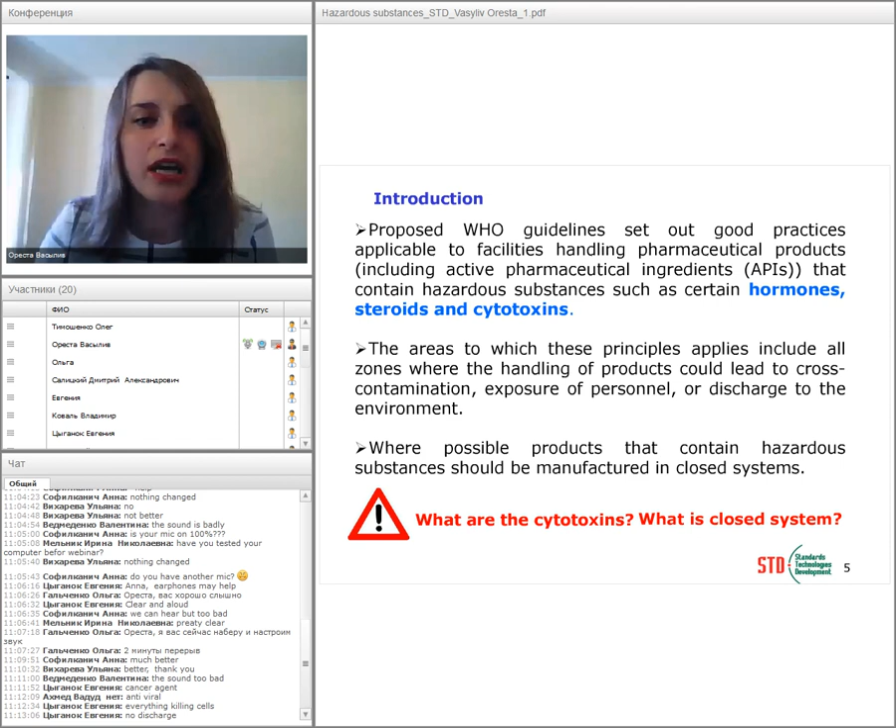And what is a closed system? How do you think, what is a closed system? So a closed system is where all the processes are being handled inside. For example, it's a clean room where all the operations are located inside, nothing goes outside. In that case, a closed system definitely should be applied, yes, there is no discharge. Should be applied when we work with hazardous substances.

So facilities should be designed and operated in accordance with the main GMP principles, good manufacturing practice principles. What do these principles include? To ensure quality of a product, definitely when we work we want the quality of our product to be the best, and therefore we need to apply principles that ensure our quality will be at the highest level. To protect the operators from possible harmful effects of products containing hazardous substances.

We also should care about workers that conduct operations with hazardous substances. Hazardous means toxic, something that can damage our health. To protect the environment from contamination and thereby protect the public from harm. Harmful is the same as hazardous. Protect the public from possible harmful effects of products containing hazardous substances.

So again, a question for you. Give me a few examples, maybe according to your experience, what are the hazardous substances generally used at pharmaceutical industry? What substances can we call hazardous, toxic, harmful? What could it be? Any variants?

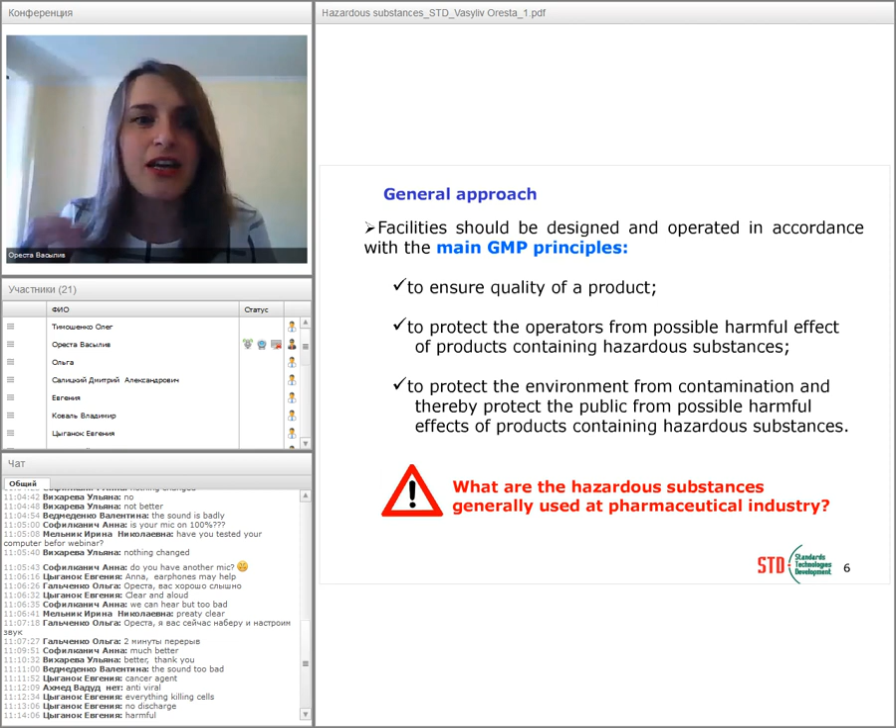For example, mercury-containing substances, definitely they possess a high level of toxicity. Some substances, we say, can have very bad, harmful influence on the health of workers.

The production of certain products containing hazardous substances should generally be conducted in separated, dedicated, and self-contained facilities. What does separate mean? They should be located separately from one another. Everything should be located inside. Dedicated means the specific operations are conducted only in these facilities, only in these premises, because these facilities are constructed specifically so that this operation should be conducted only in this particular space, this particular room.

Self-contained means the same as closed facility, as we discussed a little bit earlier, everything on which we are working is located inside, we do not allow anything to release outside. These self-contained facilities may be in the same building as another facility, but should be separated by a physical barrier and have, for example, separate entrances, staff facilities, and air handling systems.

Definitely, that should support the good work while we are working with different substances. The extent of the separation from adjacent facilities and sharing of common services should be determined by risk assessment, depending on the toxicity or hazardousness of a substance.

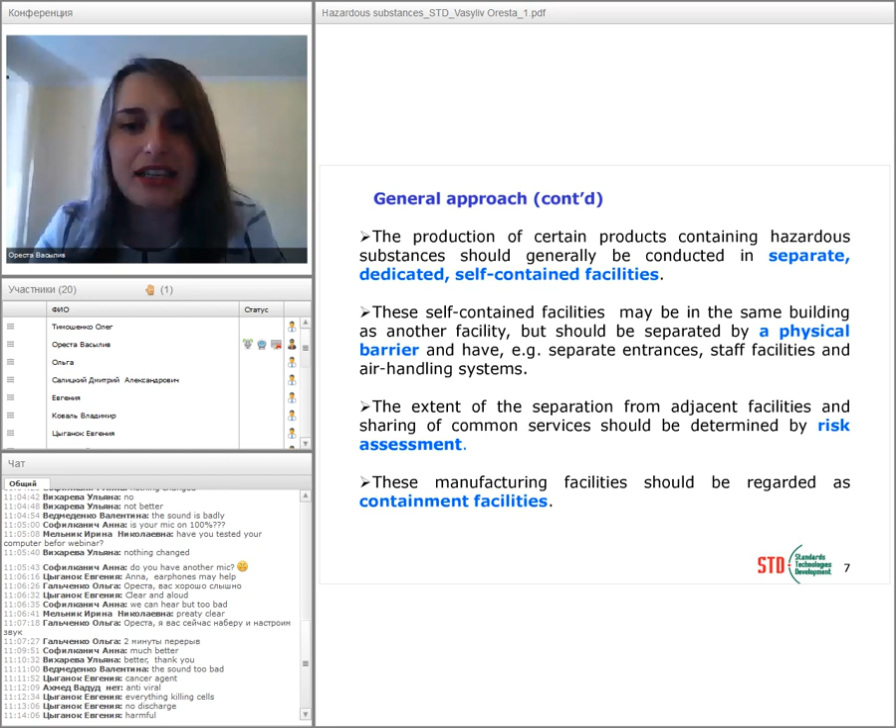These manufacturing facilities should be regarded as containment facilities. Everything that is located inside should stay inside. This means a containment facility.

Operation of closed facilities. Effective aspects of handling containment premises include appropriate facility design and layout, with emphasis on safely containing the materials being handled. The facility design should support the safest conducting of all operations done with hazardous substances.

Manufacturing process using closed systems or barrier technology enhances operator and product protection. So layout means the plan, the scheme of the facility.

Manufacturing process controls, including adherence to standard operating procedures. Definitely we need to have standard operating procedures according to which we conduct all operations.

Appropriately designed environmental control systems, ECS, or heating, ventilation, air conditioning systems, HVAC. I hope we are more familiar with the term HVAC than ECS, but in health documentation sometimes they are made equal, as ECS means HVAC.

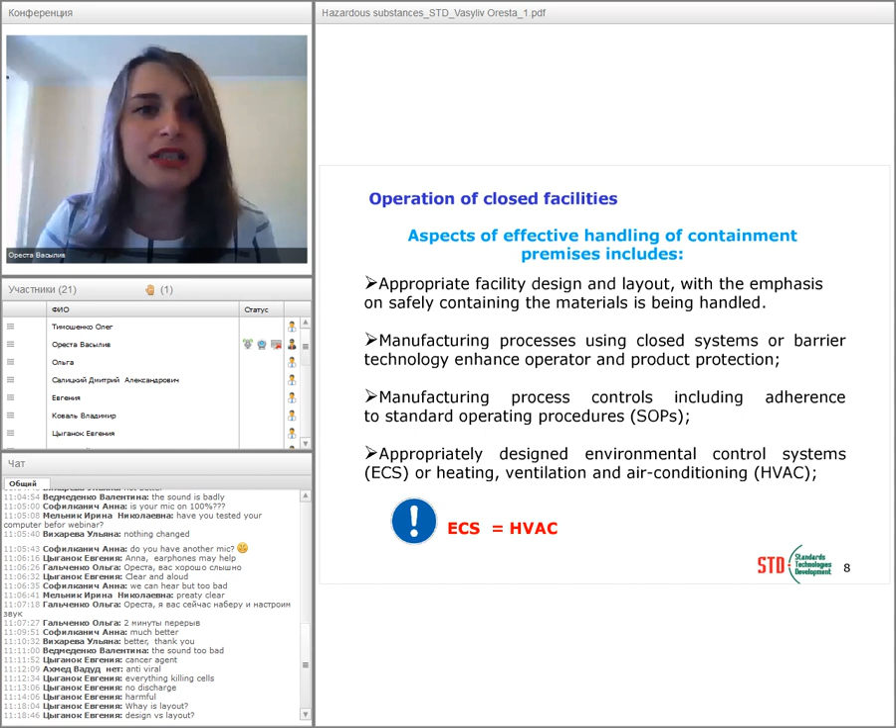Moving on. Operation of closed facilities definitely includes availability of extraction systems, application of personal protective equipment, because we talk about hazardous substances, and appropriate degowning and decontamination procedures.

What does degowning mean? It refers to procedures that tell us what appropriate gowning we need to wear while working in particular classes of cleanliness, and what appropriate protective clothes we need to have.

Decontamination - what does that mean? Please provide me the explanation. In that case I will see whether you understand what we are talking about here, or if I need to explain some terms a little better.

So what is it? Yes, removal of contaminants. Very good, its synonym is cleaning. Good, thank you. Industrial hygiene - what does that mean?

What does industrial hygiene mean? It includes monitoring staff exposure levels and medical surveillance. Monitoring staff exposure levels means focusing on the health of workers, while medical surveillance means checkups with doctors, and administrative controls.

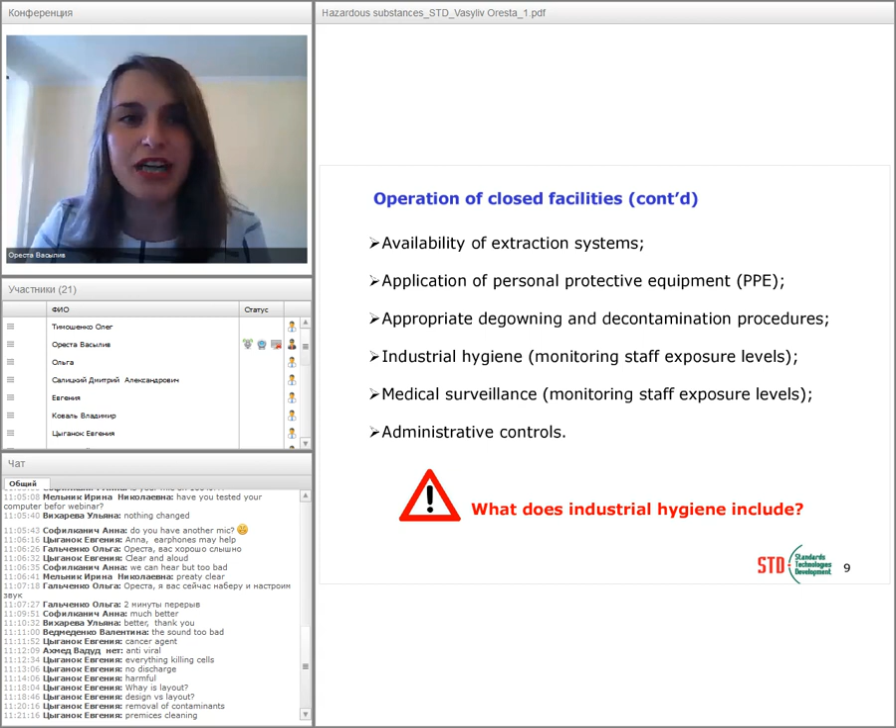Premises cleaning - good, yes. Using appropriate clothes when we work in different classes of cleanliness - yes. Determining the standard operating procedures when we work in different premises, and much more.

Now let's determine some particular terms that we mostly use today, which we can find in the normative documents. Glossary means vocabulary. Action limit - what is an action limit?

An action limit is reached when the acceptance criteria of a critical parameter have been exceeded - when our results exceed the acceptance criteria for this index. Results outside these limits will require specified action and investigation.

So when we reach the action limit, definitely some actions need to be applied for reducing the risk and reducing this data.

Okay, I will answer this - mezha dii, this is the Ukrainian variant for action limit.

Airlock is an enclosed space with two or more doors, interposed between two or more rooms, for example of different classes of cleanliness, for the purpose of controlling the airflow between those rooms when they need to be entered. An airlock can be for materials or for personnel, so we call it personal airlock or material airlock.

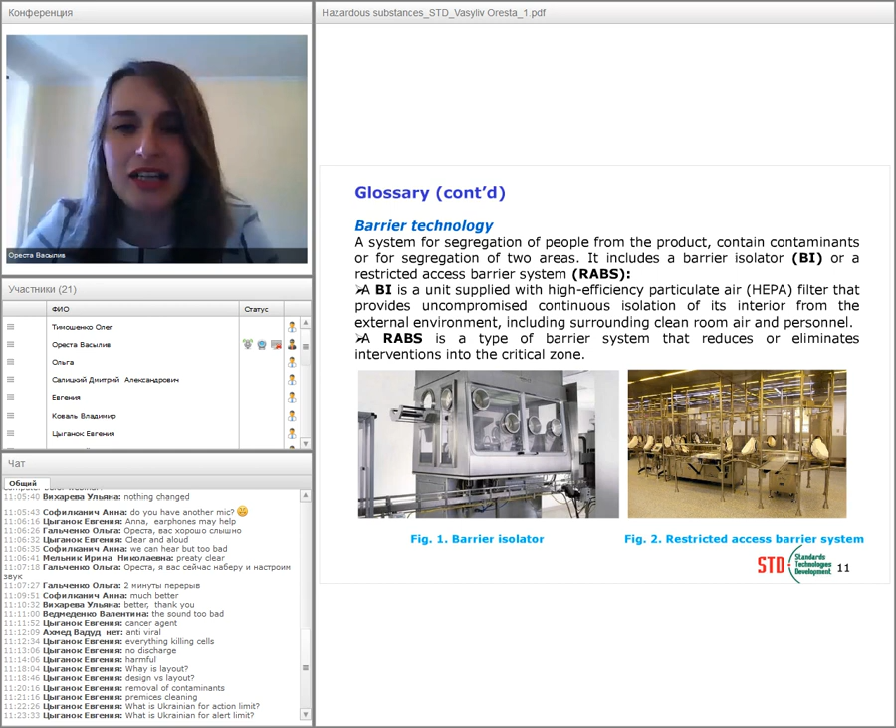What is the difference? With a barrier isolator, we can come inside this system and work there. When we talk about restricted access barrier systems, these are particular isolators where we can only put our hands through with specific glove ports, and operations are conducted this way. You can see images, figure 1 and figure 2, showing particular examples of a barrier isolator and a restricted access barrier system.

Containment. Containment means it's not contamination - it means that everything in the operation, process, device, dust, and contaminants remains in one zone, preventing it from escaping to another zone. Facility is a building or specific establishment where the operation is handled.

Hazardous substance or product is actually some toxic substance or product about which we are talking.

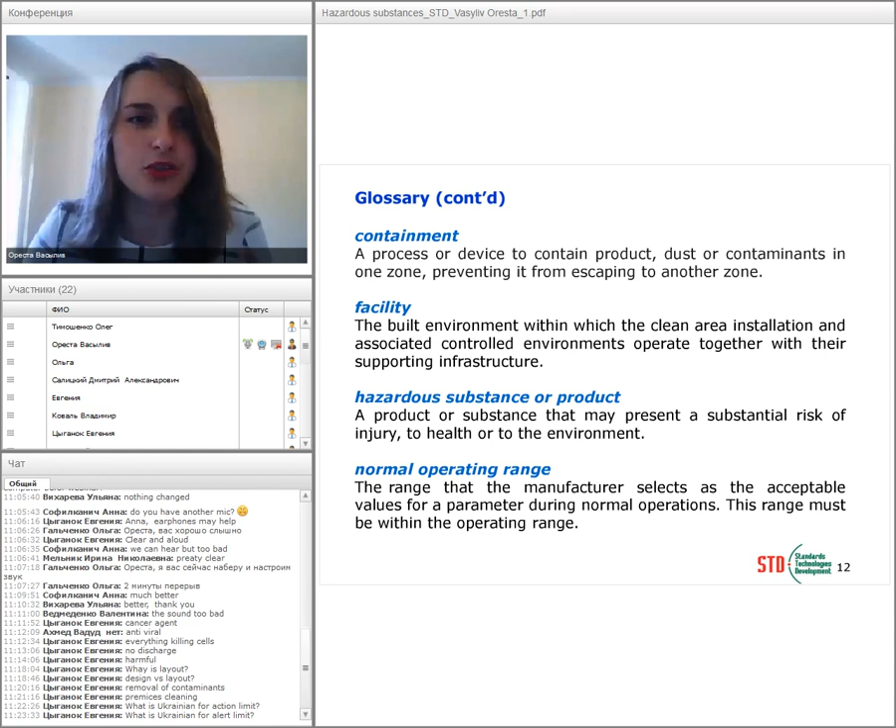Normal operating range is the range that the manufacturer selects as the acceptable values for a parameter during normal operation. This range must be within the operating range - it's like the range for a particular parameter in which we know it is okay and applies to normative requirements.

Personal protective equipment is the necessary garment and equipment required to protect the operator in the workplace.

Unidirectional airflow is rectified airflow - it means the one direction of airflow that crosses the entire cross-sectional area of the clean zone. It has steady velocity, meaning permanent stable speed, and approximately parallel streamlines.

Validation is a documented act of proving that any procedure, process, equipment, material, activity, or system actually leads to the expected result. With validation, we show that our process is reliable, our data is trustful, and this process is working absolutely fine and gives us trusted data.

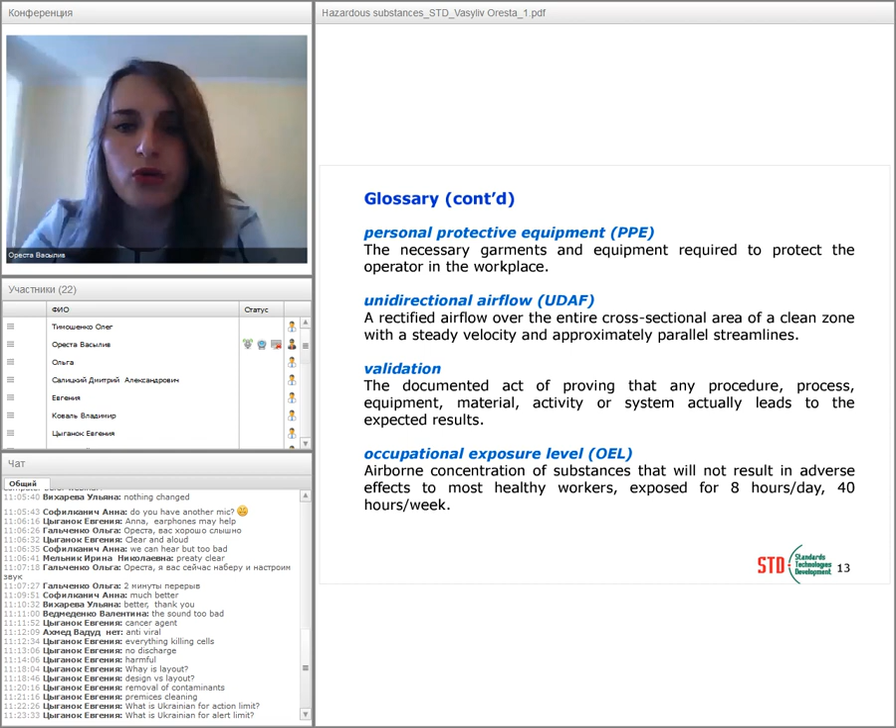Occupational exposure level is very important when we talk about hazardous substances. This is the airborne concentration of substances that will not result in adverse, meaning harmful or dangerous, effects to most healthy workers exposed for 8 hours per day, 40 hours per week.

Let's talk now about risk assessment of substance toxicity. Risk assessment should be carried out to determine the potential hazards of the substance to operators and to the environment. The risk assessment is devoted to specific processes, specific phases of the product production and control cycles, with which we can see which phases possess higher or lower risk, depending on our process.

...depending on the influence to the operators and to the environment. Risk assessment of environmental contamination should include airborne contamination as well as liquid effluent contamination - effluent means wastewater, so we talk about liquid wastewater contamination. Risk assessment should take into account national and international occupational health and safety requirements for permissible occupational exposure levels for the product in the work environment.

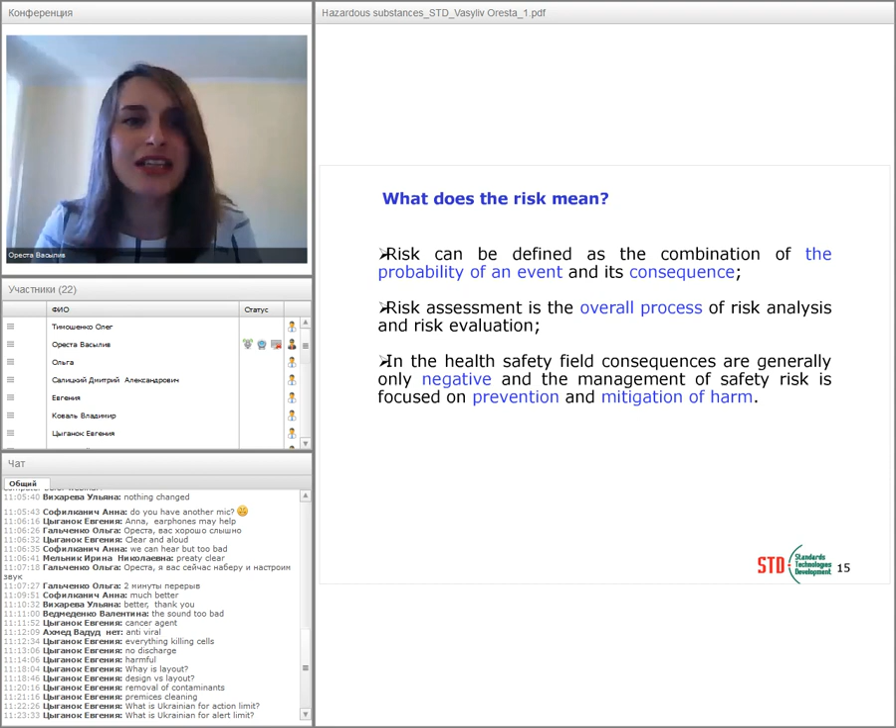Risk means actually the combination of the probability of an event and the consequence in case this event happens - so the reason and the result. Risk assessment is the overall process of risk analysis and risk evaluation. With risk assessment, we want to see all the negative consequences that we can get in various situations.

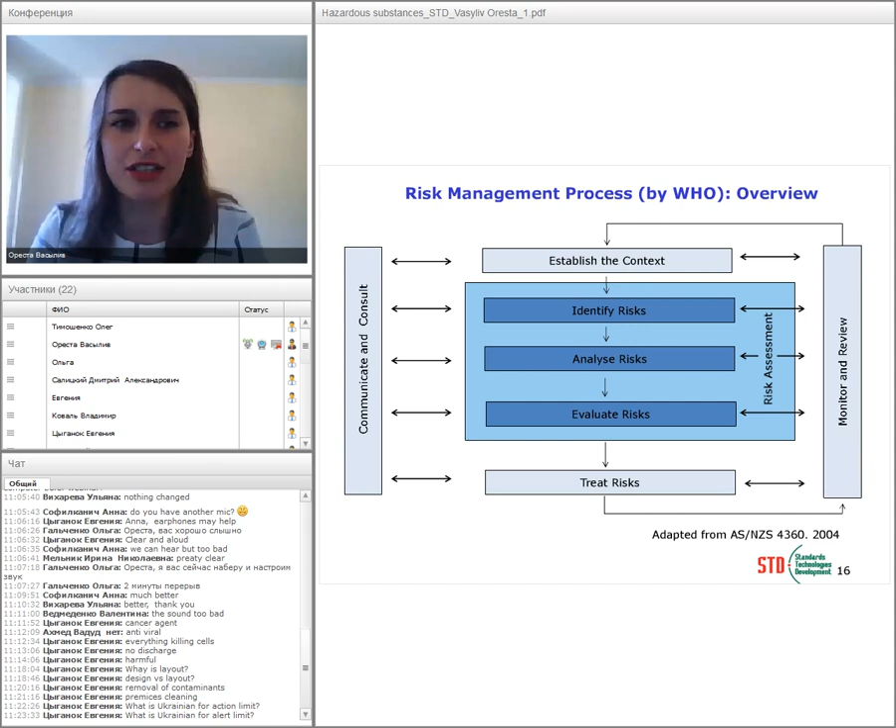The risk management process has such a scheme that we will discuss more in the full version of the webinar, not today. So the basic approach for risk assessment of substance hazardousness can include such a simple formula with which we can determine - this is a very basic, general approach to determining the hazardousness of substances.

With this approach, we multiply 4 factors. Risk from hazardous substance effect is the multiplication of: A, level of substance toxicity, determined from specific standards in which the hazardousness of different substances is determined, depending on the influence on the health of workers; B, ease of substance dispersion and transfer; C, contact of the staff with the hazardous substance during operations; and D, effectiveness of precautions and barrier technology.

For example, let it be glucose. Yes, it's not toxic, so we see the level of substance toxicity is 0.

Ease of dispersion and transfer of hazardous substances is very low, so it will be 0.5. Contact of staff with the hazardous substance while operating - let's take, for example, if we have an automatic process, so contact is only under necessity, for example if a machine breakdown occurs, and if our cleaning is not automatic, so it's during cleaning. Effectiveness of precautions and barrier technology - let's say that our barrier technology provides very good protection. So we multiply 0, 0.5, 1, and 0.5 by this formula, and again we got 0. So we have low risk.

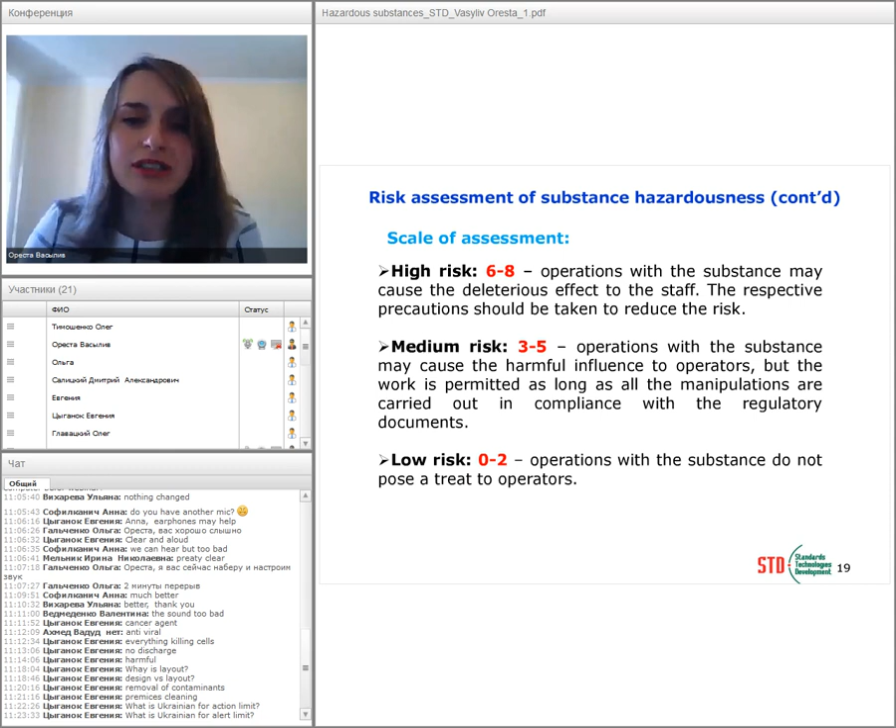So this is like the basic approach for risk assessment. There also exist different other risk assessment approaches for risk assessments of substance hazardousness, but we will discuss it in the full version of the webinar.

So now we move on to personal protection equipment and breathing air systems. Operators should be protected from toxic exposure of hazardous materials by wearing high-density polyethylene fiber material suits. Those suits should not contain any organics, because in that case they may become an additional pollutant in the clean rooms.

Or impervious means - integral, washable protective suit shoes, lower leg covers, or cleanable boots. This can be seen in figure 3. Integral hoods may be required depending on the respirator type that is used.

Suitable means appropriate. Single-use disposable gloves, definitely depending on the operation. Double gloves should be worn where direct active contact with the product cannot be avoided.

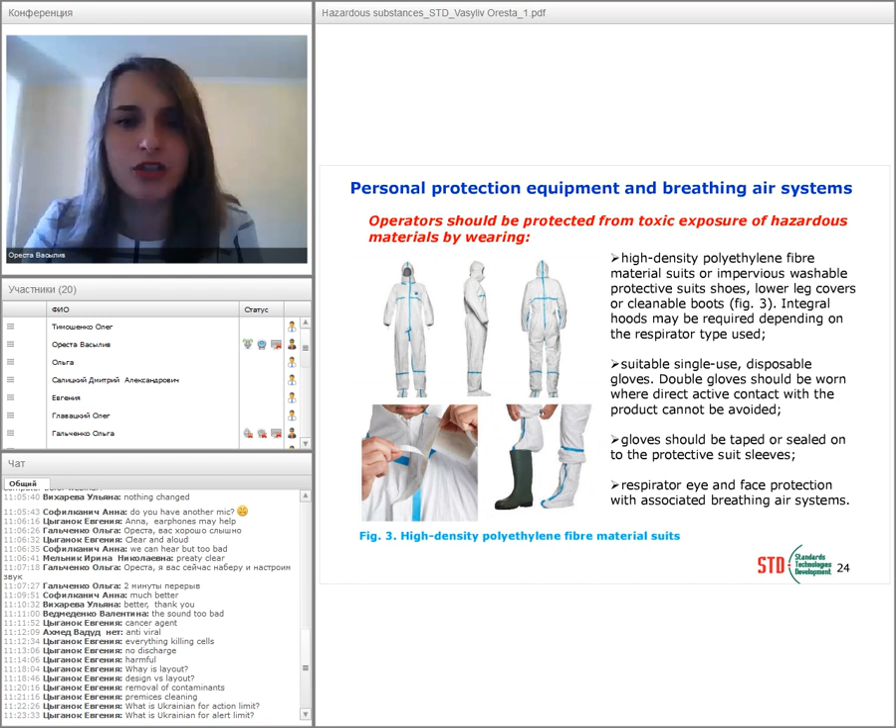So, respirator, eye and face protection with associated breathing air systems. Definitely depending on our risk assessment, on our operation, toxicity of the substance, class of cleanliness and other factors, there is appropriate gowning procedures, appropriate costume, and the industrial suit that we should wear for conducting these operations.

Okay, personal protection equipment, breathing air system. So let's talk a little bit about air supply and particular air respirators. Under application of breathing air systems, the safe breathing air should be provided to the operators. Yes, so this is like the basic scheme of the system of air supply and changeover.

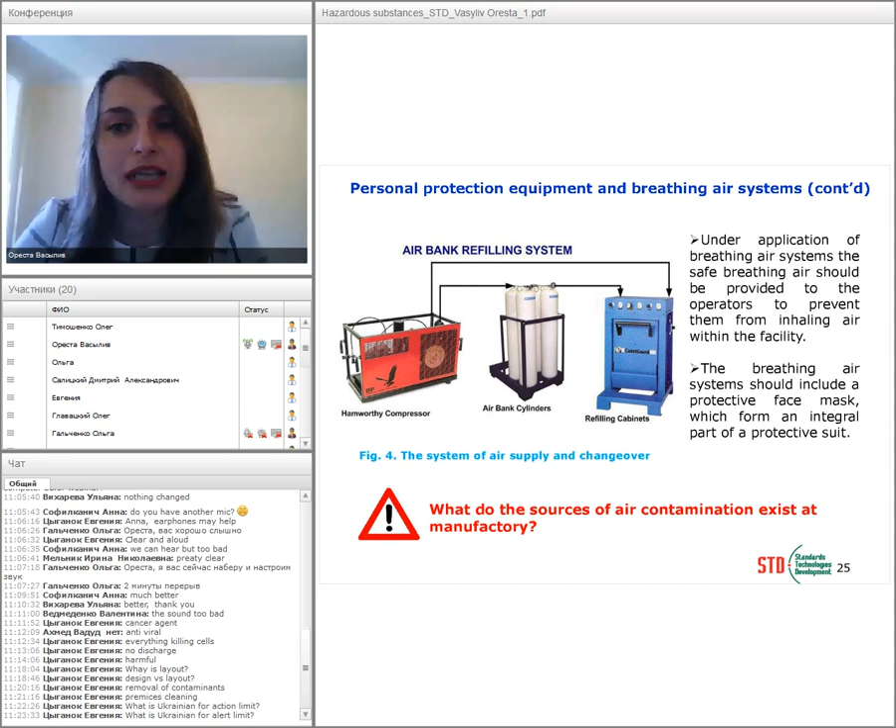This, while providing such air, means that the operator is protected from inhaling air that may contain particles of hazardous substances that may cause a really very dangerous effect on personal health. The breathing air system should include a protective face mask, which forms an integral part of a protective suit. So there exist various types of breathing air systems.

Today we will discuss 3 of them. So first is an airline respirator - it has a central air supply system that you could see on the previous slide. It connects to the operator's face mask by means of flexible hoses and quick coupling sockets. So actually, this is not a dynamic system - it's located in one area and is completely automatic.

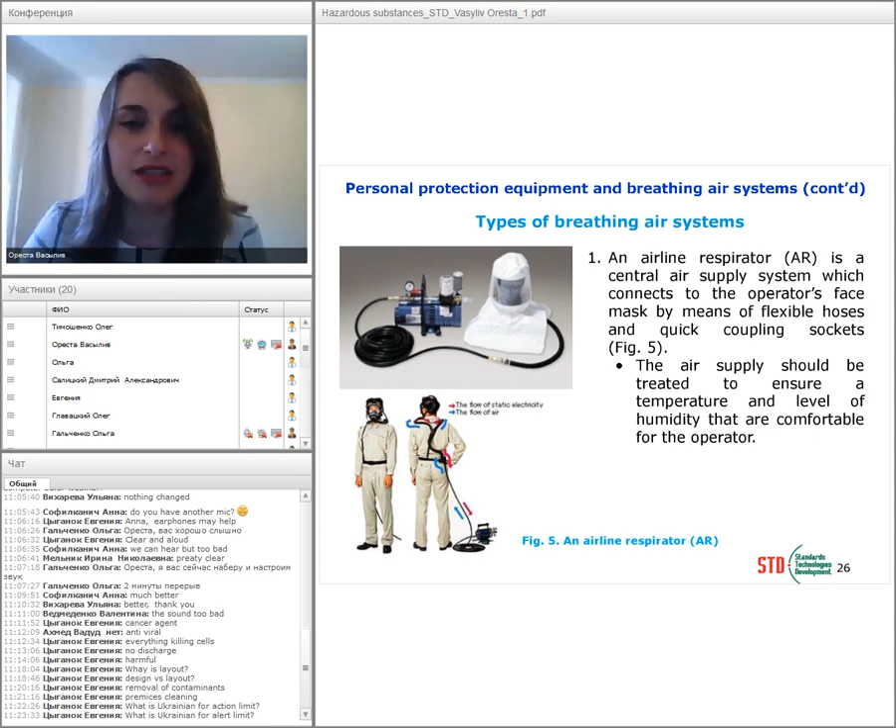The air supply should be treated to ensure a temperature and level of humidity that are comfortable for the operator. Definitely, these parameters need to be controlled because this air is being inhaled by the person who works in this premise with a hazardous substance.

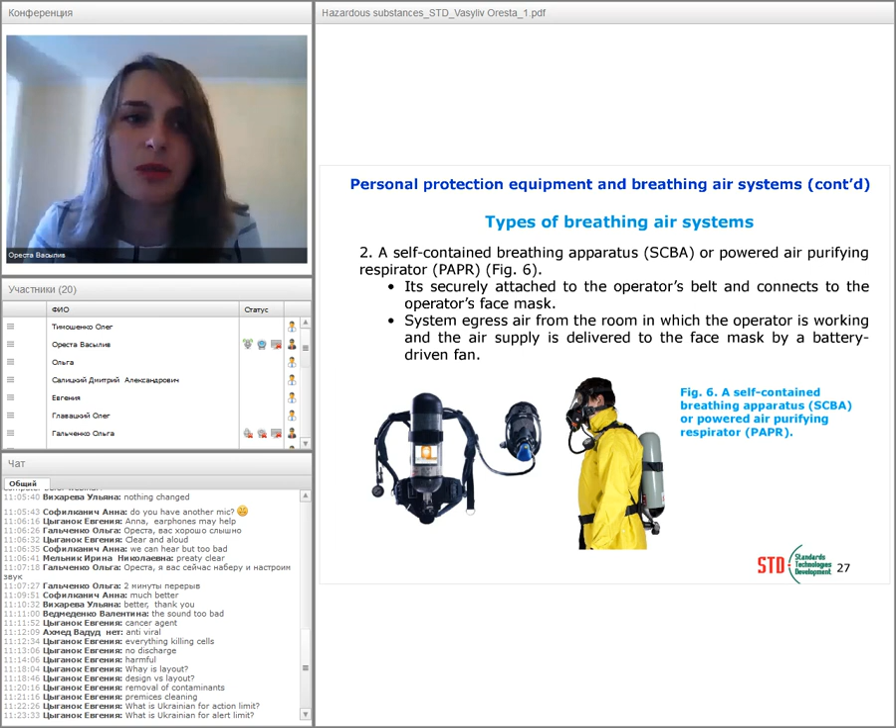Another type of breathing air system is self-contained breathing apparatus or powered air purifying respirator, SCBA or PAPR. It's securely attached to the operator's belt and connects to the operator's face mask, so it's more movable and doesn't need to be located in one place. The operator can put the balloons on his back, as shown in the figure, and breathe with the safe air located in this balloon. This can be applied for substances with a lower level of toxicity compared to the previous equipment.

When we talk about lower hazardous substances, we may use only a half mask with a high efficiency particulate air filter cartridge respirator, or an N95 type paper filter mask. N95 means that the effectiveness of filtration of particles is 95%, except oil particles - it does not work for oil particles. It does not require any additional electronic supply.

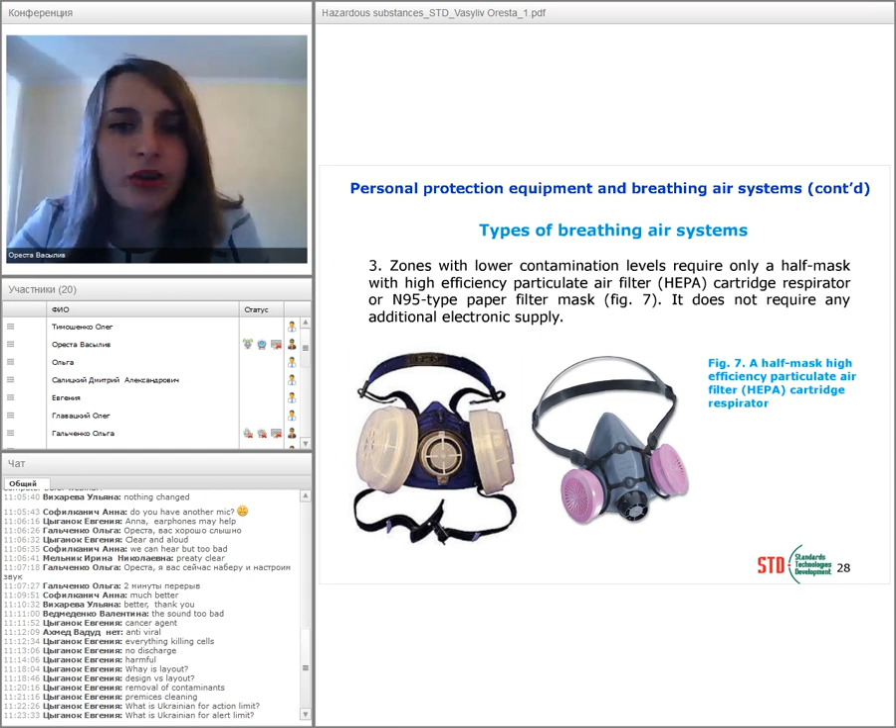A central breathing air supply system should definitely have a backup system in case the main system fails. This could be in the form of a gas bottle system with at least 5 minutes of supply, to avoid suffocation of the personnel in case of breakdown. Changeover from the normal supply to the backup supply should definitely be automatic, otherwise it can be very dangerous for the personnel.

The system should have a monitoring system and send alarm signals to a permanently monitoring location. This is important in situations such as failure of the main air supply, temperature out of specification, humidity meaning the content of water in the air, or when the gas content of the air is not appropriate - for example, carbon dioxide, carbon monoxide, sulfur dioxide, or other gases inside this air.

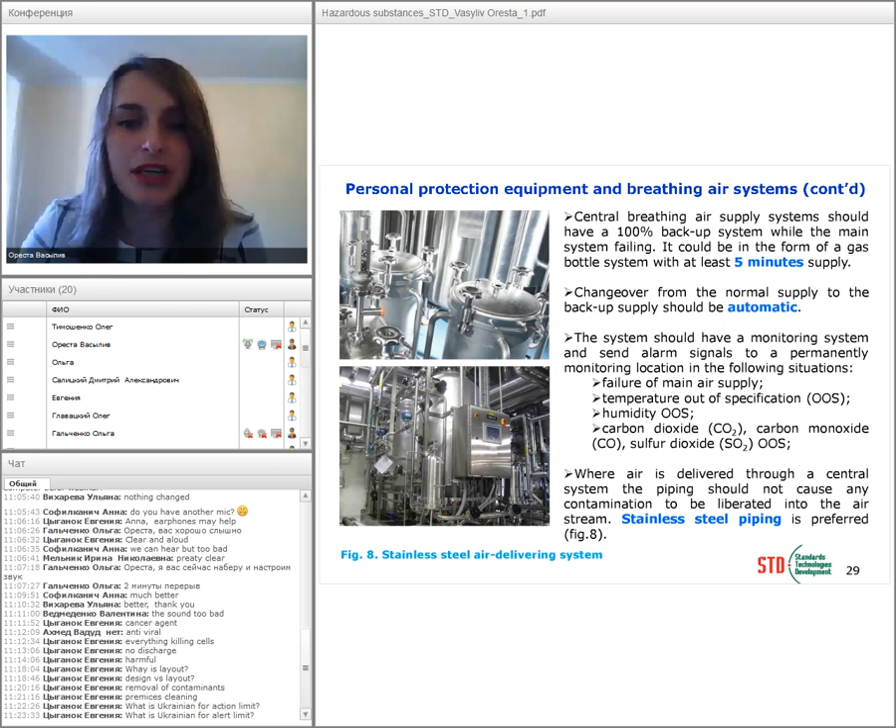Where air is delivered through a central system, the piping should not cause any contamination. It's recommended to use stainless steel piping because it does not liberate particles that can have adverse harmful effects on the operators.

Due to the hazardous nature of the product being handled in the facility, neither the product nor its residues should be allowed to escape into the atmosphere, because it can have a dangerous, very harmful effect on the environment. They should also not be discharged directly to the normal drainage system. The actual atmosphere and the public in the vicinity, meaning the nearby territories of the facility, should be protected from possible harm from hazardous substances. If liquid effluent possesses a safety or contamination risk, the effluent should be treated before being discharged to a municipal drain.

So the question for you: how could a hazardous substance affect the surrounding environment? Please give at least one example. I want to see how well we understand this, whether I need to explain something more. So how could a hazardous substance affect the surrounding environment? Please give one example.

Yes, contamination of groundwater, definitely. Some contamination, acidifying of grounds, waste water - they could cause contamination of water and grounds. That can have a really very deleterious, very adverse effect on our atmosphere, and therefore we need to be very careful while working with hazardous substances and avoid allowing them to escape into the environment.

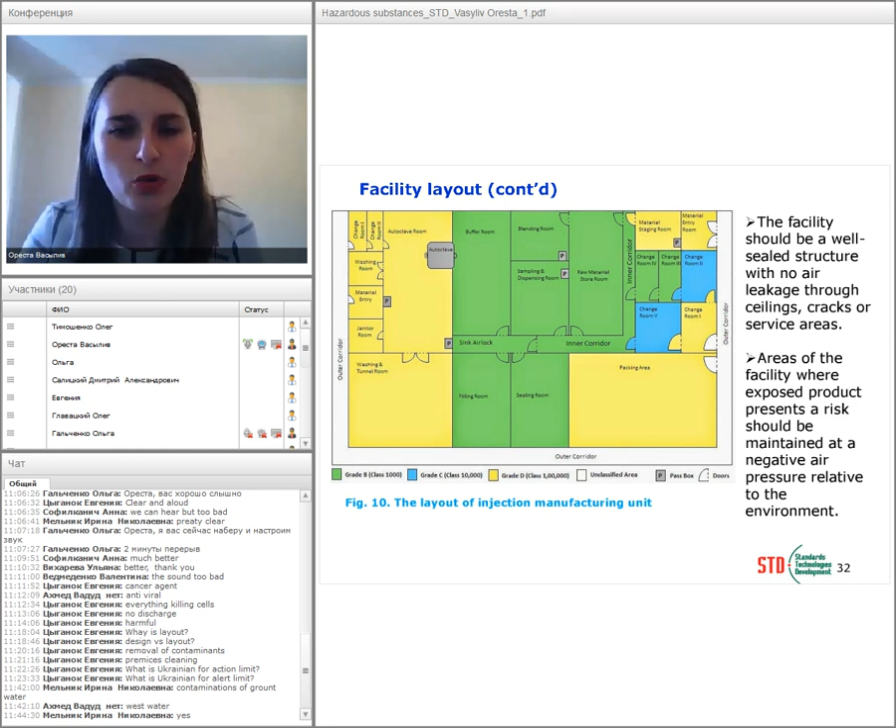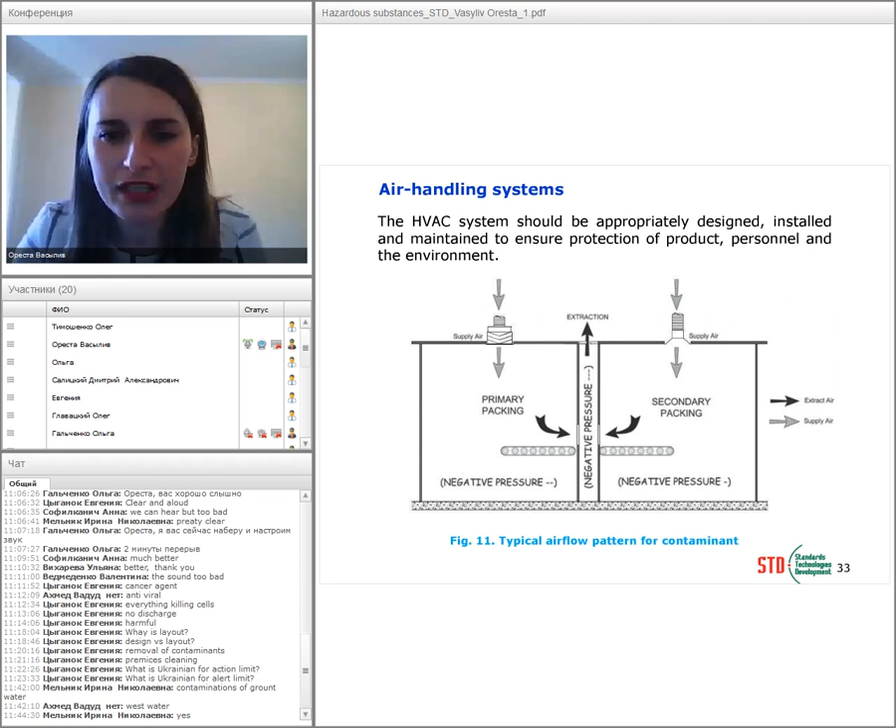Air handling system - what about it? The main thing is that processes with a higher level of cleanliness need to be conducted under more negative pressure compared to processes with a lesser level of cleanliness. You see, the primary packaging is under more negative pressure than secondary packaging.

Basic air handling characteristics of facilities and premises dealing with hazardous substances include: first, air conditioning and ventilation should be under negative pressure relative to the outside, to avoid hazardous substances escaping to the environment. Uncontrolled flow of air between the work area and external environment, or direct venting of air to the outside, is strictly prohibited, because we are always talking about containment facilities.

Visual indication of the status of room pressures should be provided in each room. Air should be exhausted to the outside through HEPA filters and not recirculated, with a further HEPA filtration stage applied to the return air. Where possible, single-pass air handling systems with no recirculation should be provided.

And again, a question for you: what are the risks, in your opinion, of recirculation of exhausted air? I'm waiting for your answers - at least one example.

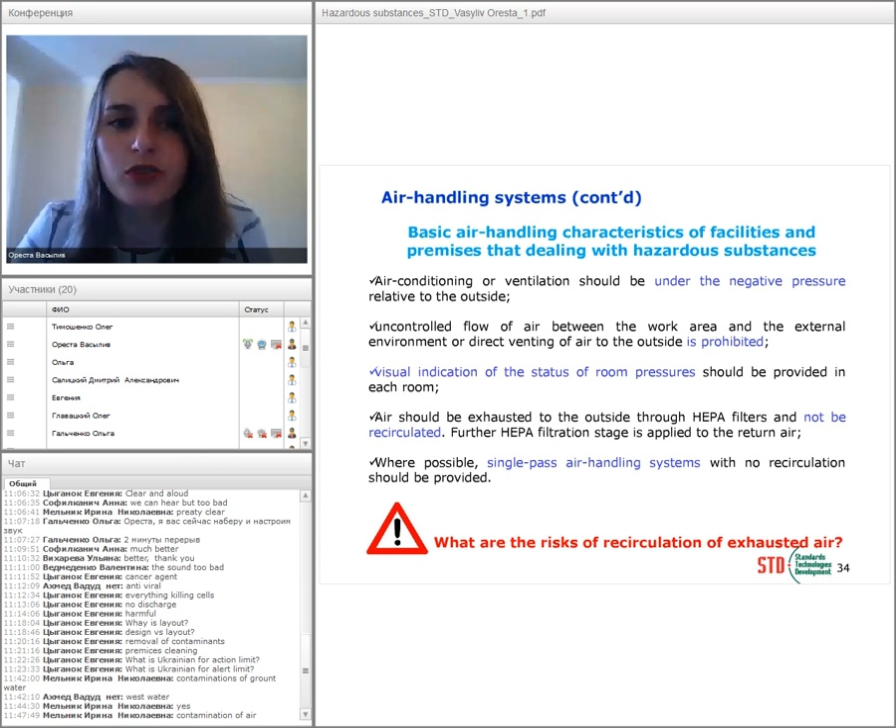Contamination, yes - additional contamination of air, and toxic influence on personnel, because if there is no set classes where respirator air systems are applied, and there is recirculation of air even in non-clean zones, or in locations where work with less toxic substances is being carried out, we can have a high risk to personnel health and to our processes. It can lead to cross-contamination. So this is not a good idea, to have circulation of exhausted air.

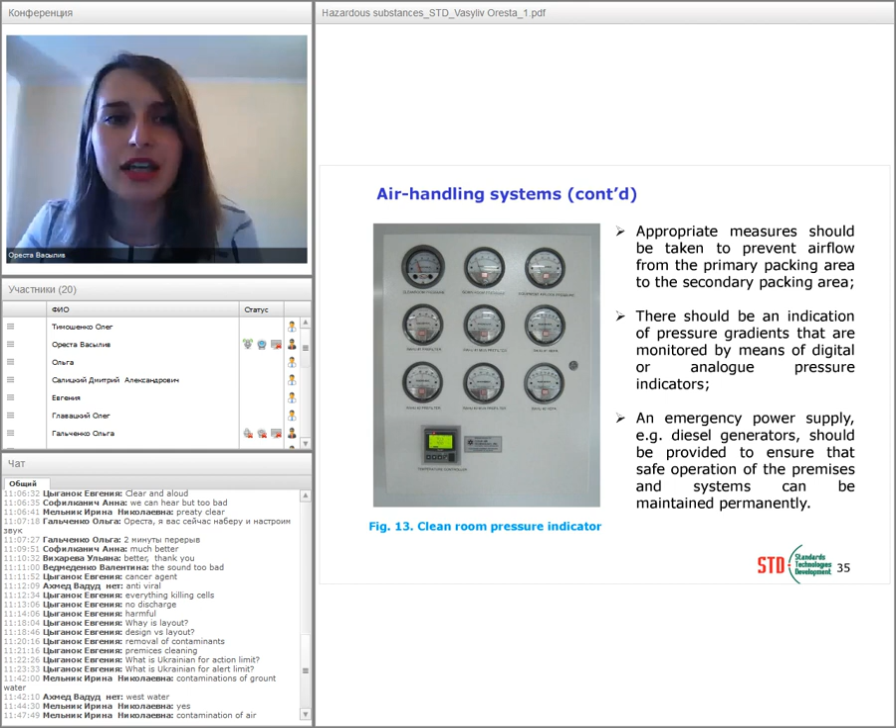This is a basic, general image of a clean room pressure indicator that shows the pressure between rooms where different operations are handled. With this we can see whether we have negative pressure, whether the pressure is within the normal operating range, and whether any alert or action limit arises. With these gadgets we can control our operations.

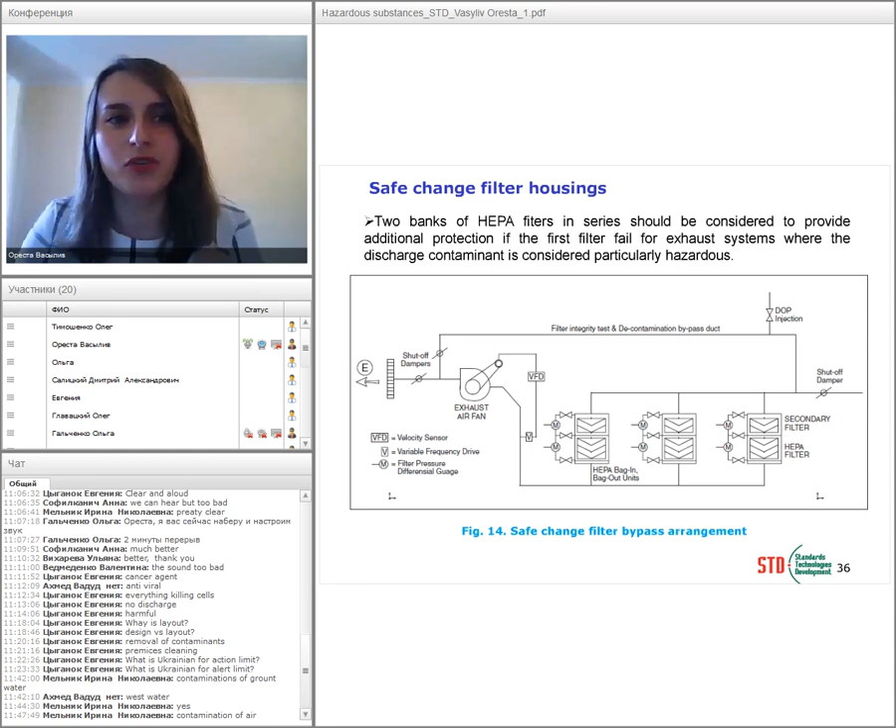Actually, filters are changed using a procedure called the bag-in, bag-out system, or bag-in, bag-out process. We will discuss this in more detail in the full version of the webinar.

Monitoring of filters should be done at regular intervals to prevent excessive filter loading. If you have excessive filter loading, it can pose a risk to our process and operations, forcing dust particles into the filter media or causing a filter to burst.

Yes, the filter will break down, resulting in ambient contamination concentration.

All exhaust points outside the building should be located as far as possible from air entry points. An exit point should be at a high level to minimize the possibility of reentrainment of exhaust air. Records of safe disposal of all contaminated filters and dust should be kept to track contamination levels and operations involving the hazardous substance.

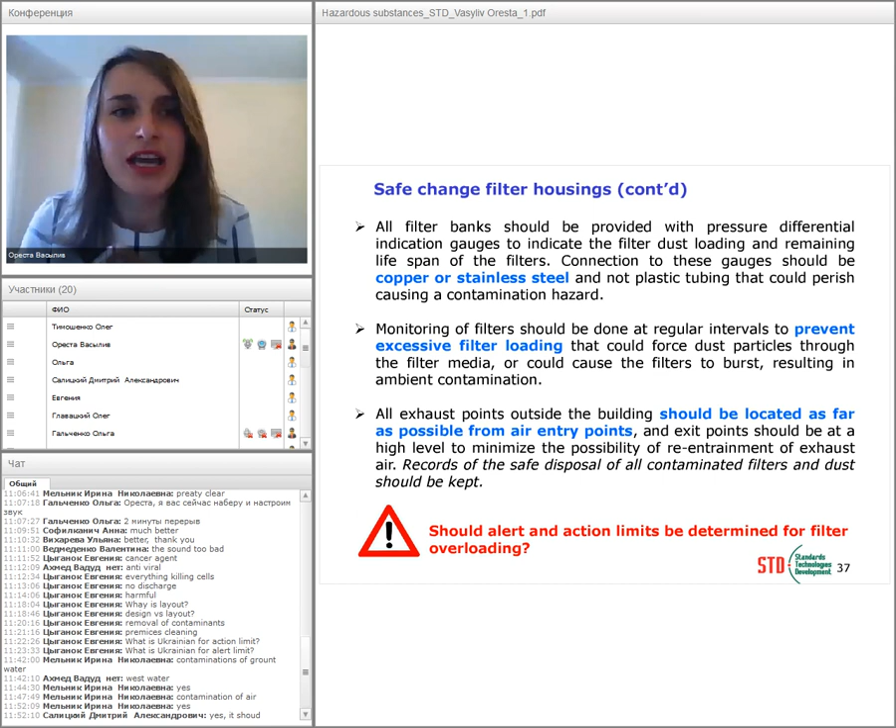Personnel decontamination systems. When we talk about hazardous substances, many are in powdery form, so we need specific equipment to overcome contamination when we need to throw away our working garments. If required, a means of preventing contaminants from leaving the facility on personal garments should be provided.

This could be in the form of an air shower, providing air to eliminate particles from the costume, or a mist shower - an appropriate water, mist, or fog shower that causes the adherence of particles on the surface of the costume so they cannot liberate into the environment, and because of their adhesion can then be easily thrown away.

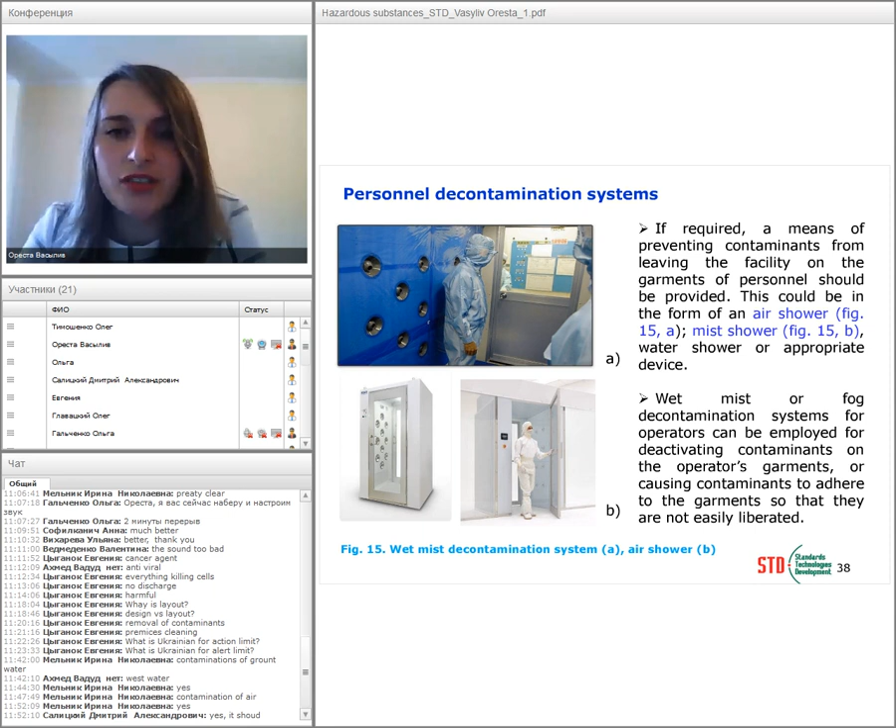So here on figure 15, you can see the decontamination system and shower, with some basic examples.

Effluent treatment. The general scheme of effluent treatment requires that liquid and solid waste effluent be handled in a way as not to present a risk of contamination to the product, personnel, or the environment. All effluents should be disposed of in a safe manner, and the means of disposal should be documented.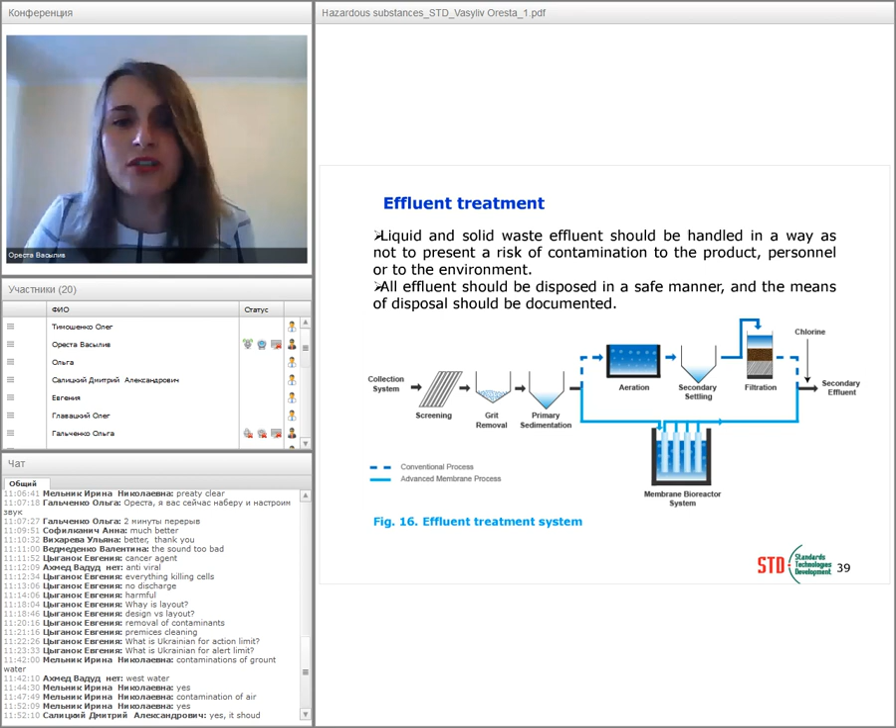Let us summarize what we discussed today. Hazardous substances that pharmaceutical products may contain, as determined by the World Health Organization, include certain steroids - with special emphasis on steroids - hormones, and cytotoxics.

Operations with hazardous substances should be carried out in closed, contained facilities with appropriate layout and HVAC systems functioning. Risk assessments need to be applied for determination of the toxicity of the respective substance and its potential hazards. Manipulation with hazardous substances and their waste material should not pose a threat, risk to the environment, personnel, public, or lead to cross-contamination.

The respective type of breathing air system is obligatory depending on the level of the substance's toxicity. Depending on which substance we work with and its level of toxicity, we need to apply the respective air breathing system for appropriate protection of ourselves while working with that substance.